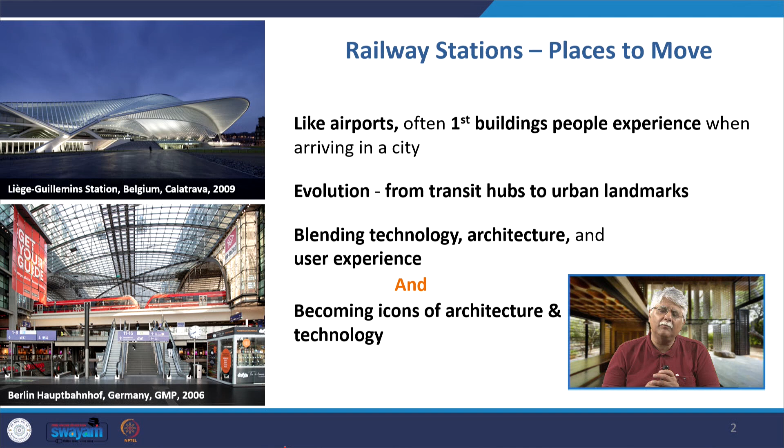Railway stations are familiar to all of us, we've all probably used them, particularly in India. They are places to move, like airports, often the first building people experience when arriving in a new city. Its evolution from what it was, just a transit hub, to an urban landmark today is phenomenal. The blending of technology, architecture and user experience has taken place, and therefore railway stations themselves have become icons of architecture and technology - not just gateways for travel, but symbols of connectivity, bridges between people and places and their cultures.

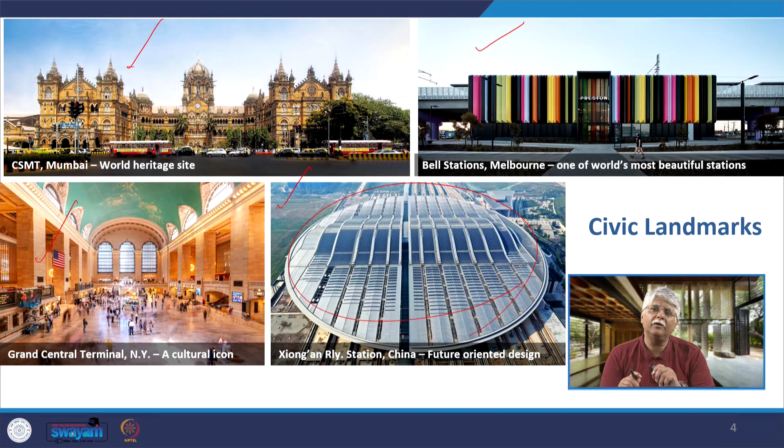The stations today are not only just stations as transit hubs, but they are also civic landmarks - monuments of public life and identity. They reflect changes in mobility, technology and culture. If you have the Chhatrapati Shivaji Terminus in Mumbai, that is a World Heritage Site. Or the Bell Station in Melbourne, one of the world's most beautiful stations. Or the Grand Central Terminal in New York, which is a cultural icon. Or one of the latest, the Xiong'an railway station in China, which is a future-oriented design - you see all these solar panels mounted on the railway station. All of them civic landmarks in their own right.

Now if you look from history to contemporary how things have changed, we have seen pictures often in my presentation of the St. Pancras station, making several points through these pictures. It shows us a historic station which is monumental and an industrial age icon. On the outside it's got an eclectic facade, architecture of a mishmash of several styles, but as you enter you find a tremendous glass and steel vault over the railway tracks, showing the technology aspect of glass and steel being used there.

In the 20th century the shift happened to a more functionalist modernist design, like we find here in the Roman Termini station in Italy in 1950. It has got this massive cantilever in front, this kind of design in front and these blocks behind it - a very functional modernist design of the 20th century.

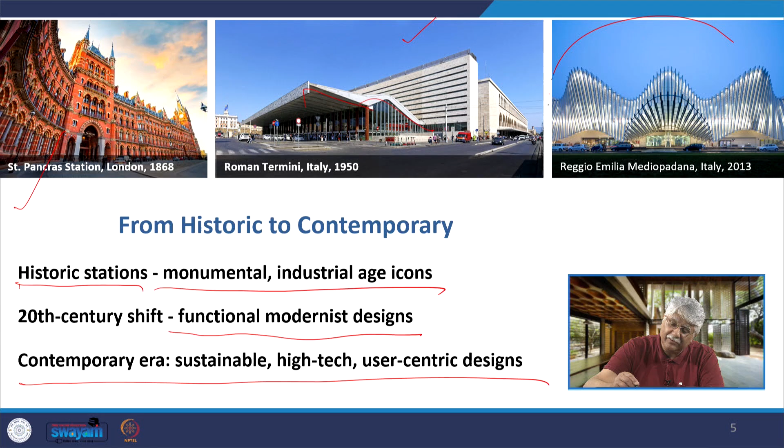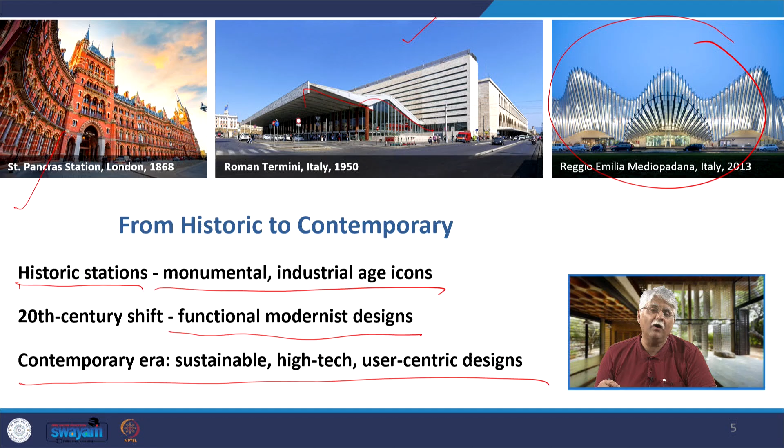But when we come to contemporary times, our stations are sustainable, high-tech, user-centric, and generally many of them are fantastic in their forms. This is the Reggio Emilia Mediopadana station in Italy - we will simply call it the Mediopadana station. The legacy of high-tech architecture in transport hubs, where today's ideas came from. First is structural innovation, and for that the pictures I am showing you actually are not of a station but of an airport.

They are exposed trusses, tension structures, for example concourses. Concourses of airports and railway stations are big halls made from repetitive steel and glass modules which are flexible, efficient to build and filled with daylight. If you remember any concourse space like that, you think of natural light flooding into the concourse.

Services as design: in the early high-tech, as in Pompidou and Lloyd's, the services are exposed and celebrated visually. In the mature high-tech, like Commerzbank, the Swiss Re or the Gherkin building, the services become integrated smart systems which are celebrated functionally.

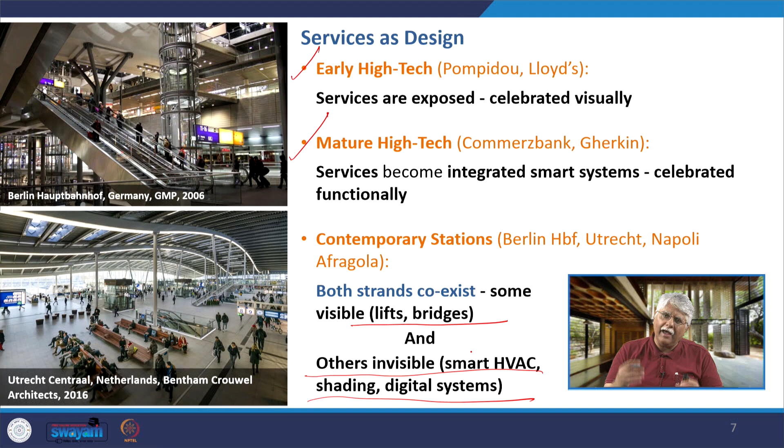In contemporary stations like the Berlin Hauptbahnhof, Utrecht, Napoli Afragola station, both strands of early and mature high-tech coexist. On one hand, there are visible lifts and bridges inside the building as in early high-tech. Along with that, there are other invisible features like smart HVAC, shading and digital systems, which as part of mature high-tech are there but invisible.

Sustainability roots are there. Early experiments in natural ventilation, double skin facades and building management systems, we find in, for example, the Swiss Re in 2004. That evolved into today's green stations and terminals with solar roofs, rainwater harvesting and smart BMS.

Now when I am relating a corporate building, an office building with a station, please don't feel surprised. This could apply to many other building typologies also, where a similar ideology or concept of rainwater harvesting, building management systems or solar roofs is being followed.

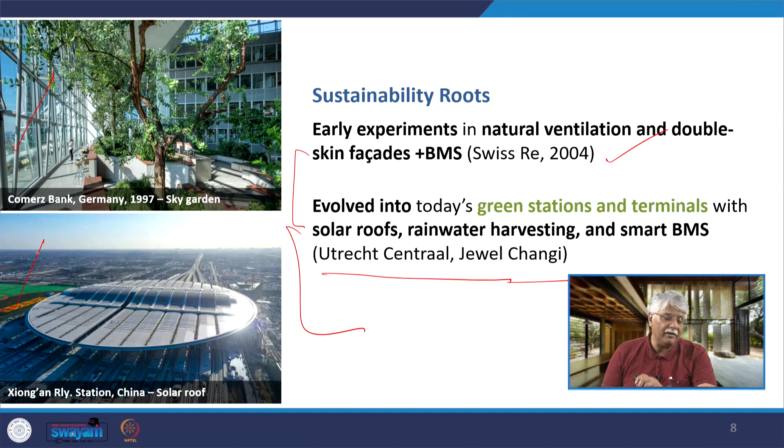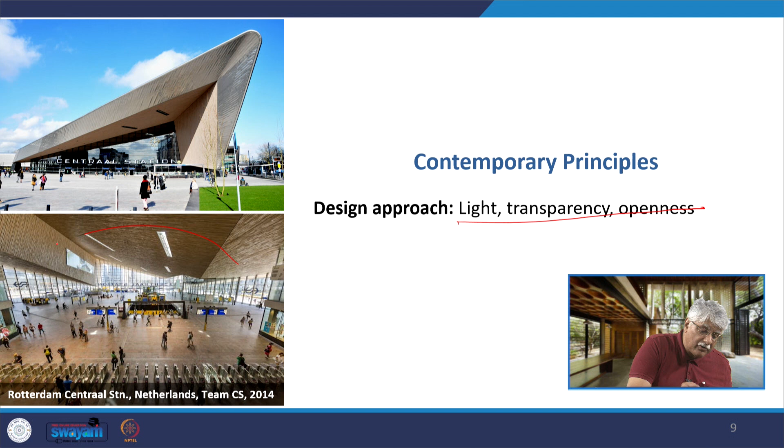In contemporary principles, the design approach in stations is all about light, transparency and openness. Looking at Rotterdam Central Station, Netherlands, by Team CS, we find this monumental structure with tremendous openness in the concourse of the station.

Contemporary principles about stations also focus on technology and smart systems, important for the comfort of passengers and ease of travel: smart ticketing, real-time information, digital wayfinding and automation, passenger comfort through tech-driven design. That means even the design of the chairs is tech-driven, so when a passenger has to sit for a longer period, he continues to remain comfortable.

Contemporary principles also address passenger experience regarding comfort, providing lounges, shops and accessibility in railway stations, like airports. They provide human scale interiors in mega structures, leading to inclusivity, meaning universal design accessible to all, whether typical or diverse, including those who are physically challenged, with wayfinding for the user.

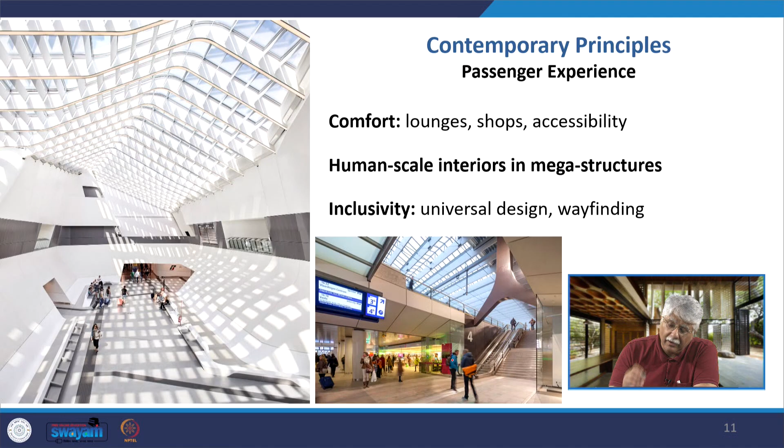Contemporary principles also include sustainability in stations. This station, Utrecht Centraal Netherlands by Bentham Crouwel Architects, has, because of its roof design, daylight optimization, rainwater harvesting, energy efficiency through minimizing HVAC load, solar integration and a lightweight design to reduce the use of materials.

Thus, daylight harvesting, natural ventilation, green roofs, solar integration and even adaptive reuse of old stations have now become part and parcel of contemporary railway stations.

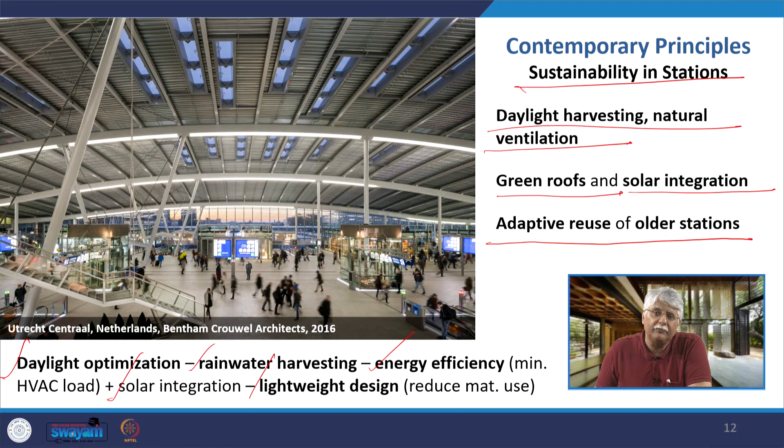Contemporary railway stations are not just transport terminals. Now they have become urban connectors, physically and socially joining different parts of the city, removing barriers created by old railway lines, through bridges, concourses and plazas that allow free pedestrian movement across the track.

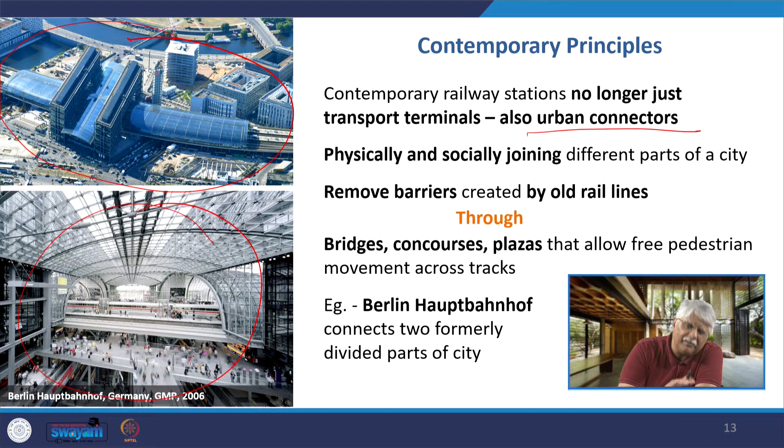One such station is the Berlin Hauptbahnhof. The Berlin Hauptbahnhof station connects two formerly divided parts of the city. In the aerial view, it's actually joining two divided parts, with plazas, concourses and bridges that link those parts together and allow people to move from one to the other through the station. So people are not just coming here to travel from point A to point B; it is not just a transit hub, it has become a civic space.

Contemporary principles indicate that urban integration is taking place into the city fabric through railway stations, because they also have shopping malls, offices, even housing, and public meeting places, not just transport points. They are catalysts for redevelopment, stimulating new life and growth in the areas they connect. They cause economic growth and development where built, and transport that economy and resources to the areas they connect. It's multi-modal connectivity, hubs where different transportation systems and urban areas converge together.

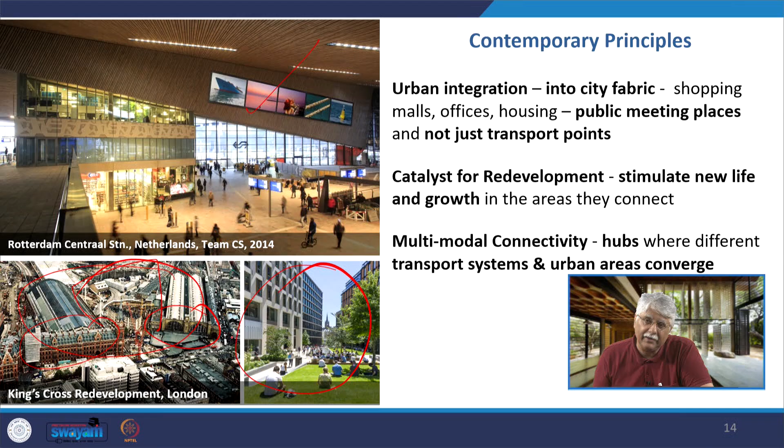We have examples of the Rotterdam Central Station in the Netherlands, and the very interesting example of a redevelopment involving St. Pancras station and King's Cross station, two stations close by, being worked upon so that there will be an entire new development between them. You see this picture of that development happening, and an urban regeneration taking place in this area.

The economic and cultural impact: they are catalysts for redevelopment, able to revitalize neighborhoods and attract investment, create civic pride, and act as magnets for tourism. They have mixed use hubs with retail and offices.

If we want to look at the economic impact, let's look at the example of the Liège-Guillemins Station in Belgium, by Santiago Calatrava, 2009. The economic impact: it boosted Liège's regional profile by connecting it to the European high-speed rail network. The cultural impact was that it became a city landmark, attracting visitors and redefining the city's global image.

Is it not similar to the Bilbao effect, that one building can make such tremendous socio-economic changes to the city, just as the Guggenheim Museum had done in Bilbao?

The global spread of railway stations today, we will call them transit hubs or multimodal hubs. These high speed hubs we have in Europe, like in Liège, Torino, Napoli. In Asia there are mega terminals like the Beijing South or the Bang Sue Grand, or other regions where there are sustainable upgrades like the reservoir in Melbourne and the Newmarket in New Zealand.

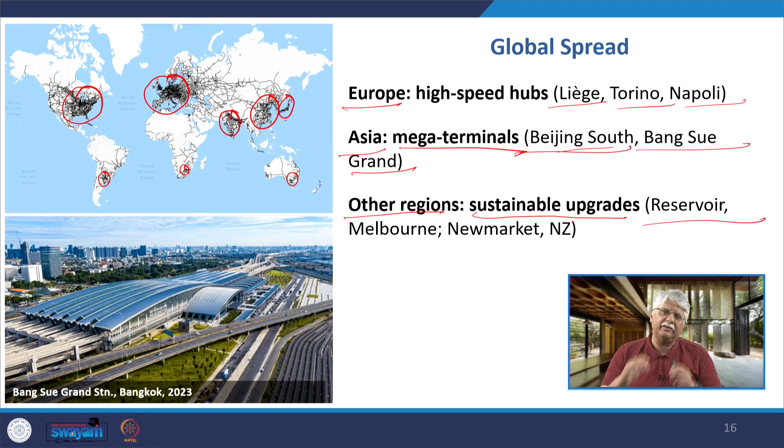So when we look at the case studies, whether the Afragola station by Zaha Hadid, the Rotterdam Central Station in Netherlands by Team CS, the Liège station by Calatrava, or the Torino Porta Susa station by Arep, each station has a unique design philosophy showcasing global trends and regional responses.

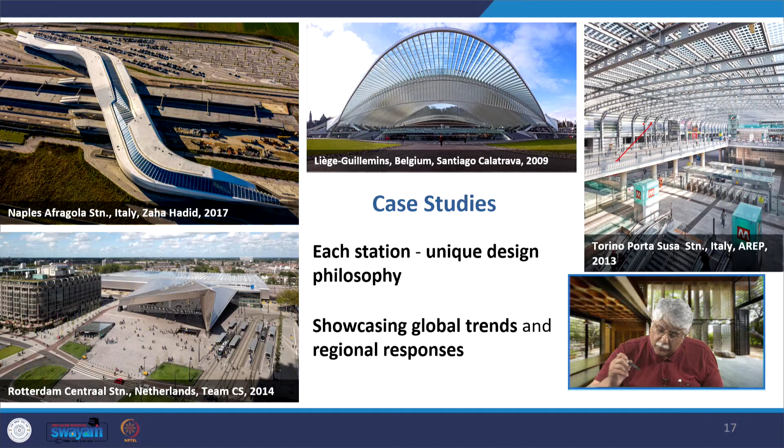Of all the people whose stations are today popular, the iconic ones globally, who have built the maximum number of such stations, the first name is Arep, who for example designed the Torino Porta Susa station. But the second name is that of Santiago Calatrava.

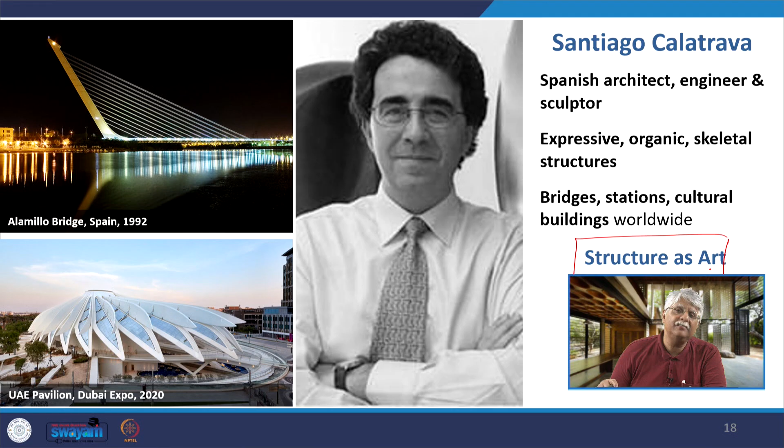He is a Spanish architect, engineer and sculptor. His design is very expressive, with organic, skeletal structures. Bridges, stations, cultural buildings he has designed worldwide, and in his case structure is used as art. Why are Calatrava stations pioneering? Because there is a structural poetry in the transit buildings. He transformed stations from machines for movement into architectural sculptures, like the Lyon Saint-Exupéry, or we can simply call it the Lyon Airport Railway Station, with a roof like a bird taking flight, symbolizing speed.

So the Lyon Airport Railway Station can be compared with the TWA terminal in USA by Eero Saarinen, many years back. Technology has advanced tremendously since he designed this station in 1994, but the idea is there, and this is called sculptural expressionism.

The spatial experience: he made passenger journeys monumental. Soaring concourses, dramatic daylight, sculptural canopies like in the Liège station in Belgium. The stations have become cathedrals of travel rather than just infrastructure.

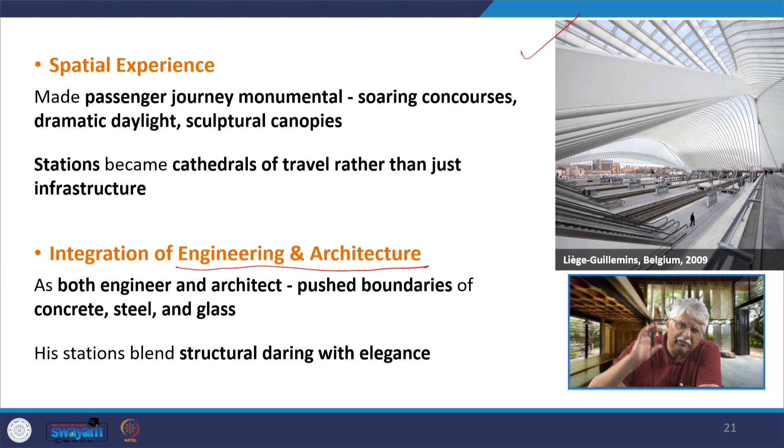There is integration of engineering and architecture in the work of Calatrava. As both engineer and architect, he pushed the boundaries of concrete, steel and glass, and his stations blend structural daring with certain elegance.

He has global influence. Not only is he designing stations himself, but others have followed to design stations and even airports. I don't know how much of that influence came via Calatrava versus personal inspiration, but we do find a new generation of station designs happening worldwide, especially in the high speed rail era. Many later projects carry echoes of his dramatic, dynamic roof forms, like the Naples Afragola station by Zaha Hadid or the Beijing T3 airport terminal by Norman Foster. We will come to this later.

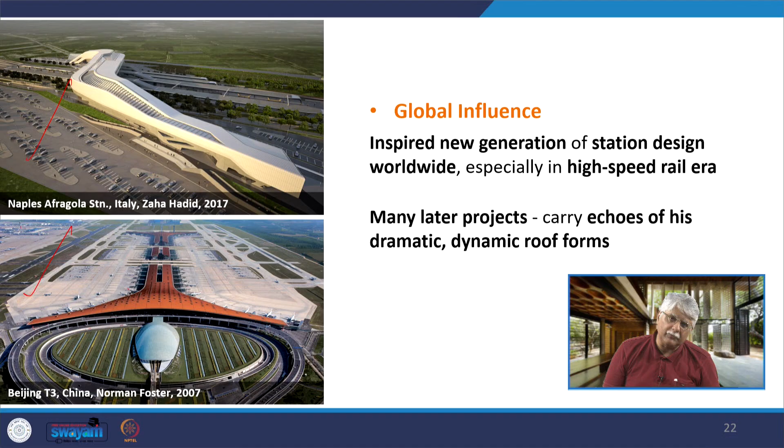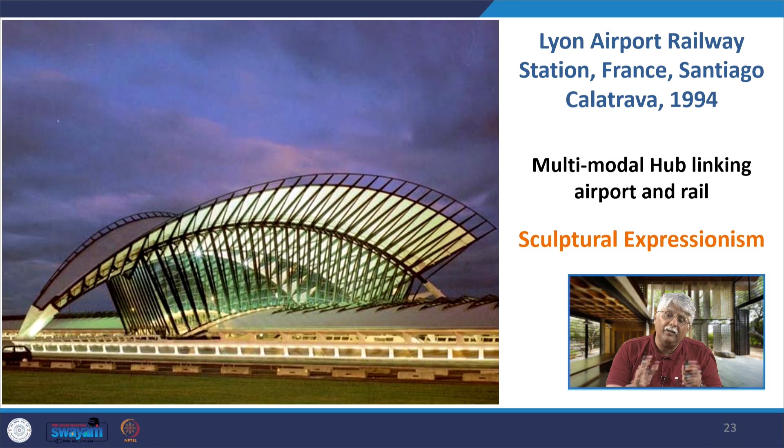Now let us come to the Lyon Airport Railway Station by Calatrava, 1994. It is a multi-modal hub linking airport and rail, and it is sculptural expressionism. The whole building is like an expressed sculpture. Look at it: this is the station, then there is a connection, then there is the airport. It is a multimodal hub, and that is one important thing that has happened to stations today.

They are turning into multimodal hubs, not just for trains alone. Many other activities are combined together in the station. It is conceived as part of a multimodal hub that integrates airports, highways and high-speed rail, making it the regional connector for France and Europe.

This is how the multimodal system is: we have the airports, and then we have the railway station here, and then there are other kinds of transport, for example buses, etc., whose provision is also made alongside. I mention this here because we will see a similar kind of concept or design in the station in Lisbon by Santiago Calatrava.

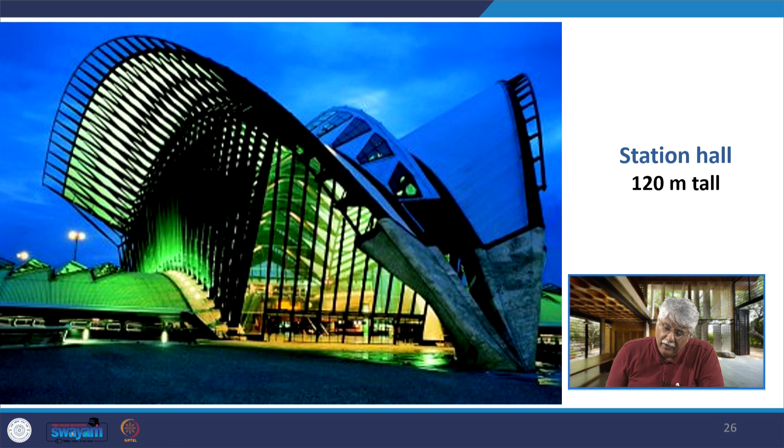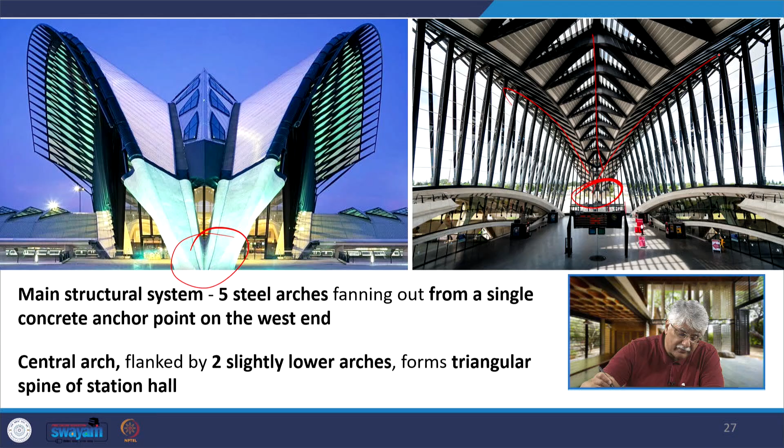The station hall is 120 meters tall. The main structural system is 5 steel arches that fan out from a single concrete anchor, which is here on the west side of the building, at the west end. The central arch, flanked by 2 smaller arches, forms the triangular spine of the station hall.

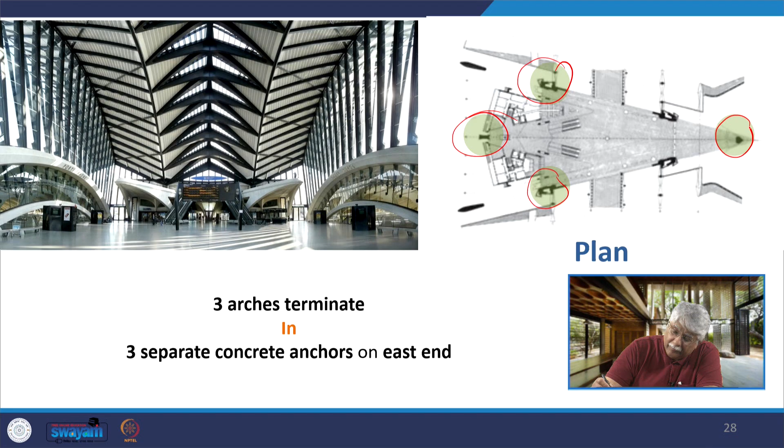Then there are 3 arches that terminate at 3 concrete anchors at the east end. So there's 1 anchor at the west end and 3 anchors at the east end. This is how the load transfer takes place, through these anchors down to the ground, and also from the structural members here.

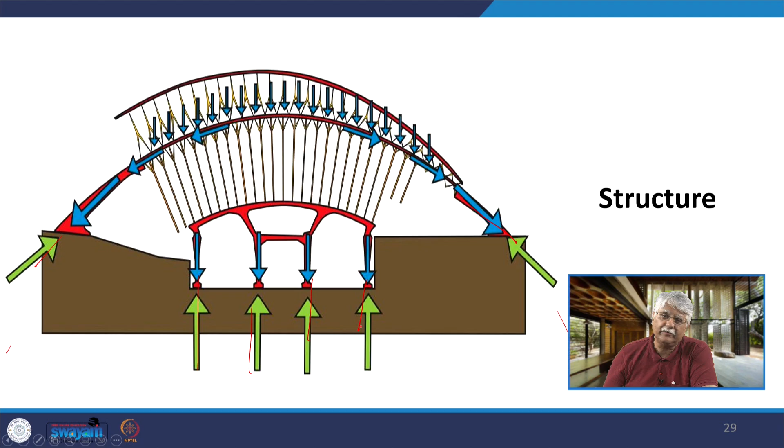Moving on, come to the Oriente Station in Lisbon, again by Calatrava in 1998, a filigree of steel construction, a network of steel members, a whole forest of steel members put together. It is an amazing building built for Expo 98 as Lisbon's main multi-modal transport system.

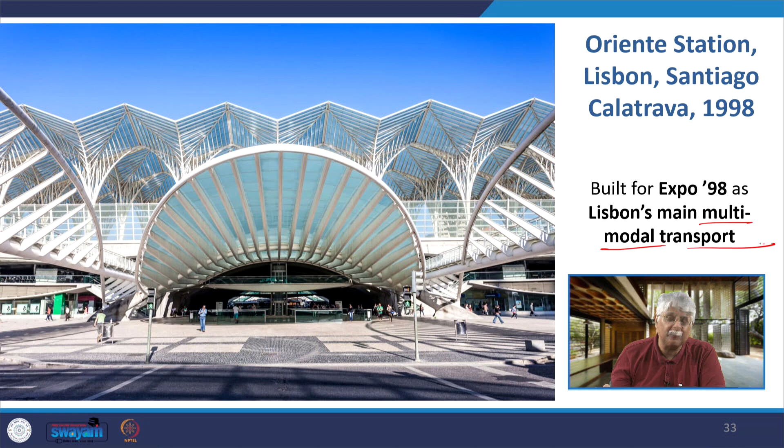What all is there in the multimodal system? It's got high speed trains, intercity and suburban rail, the Lisbon Metro station, local and regional buses and long distance coaches, taxis, and pedestrian walkways.

If you look at this plan, the aerial view, this side is where the buses and the cars are parked. This is the actual railway station where the high speed rail comes, and below this is the metro station. As you go from this side you are going towards the expo.

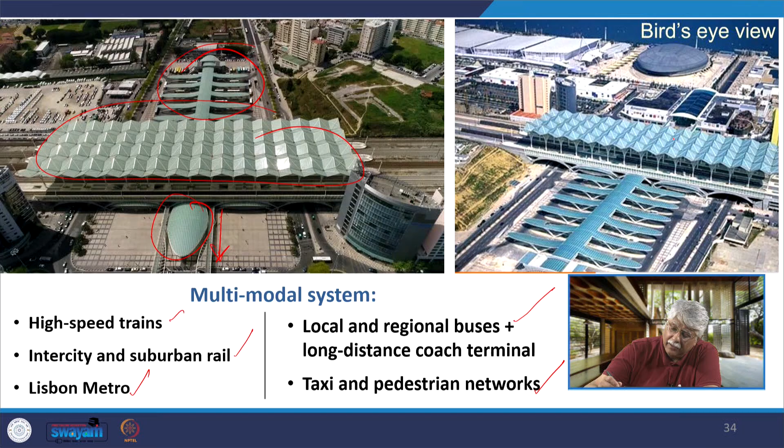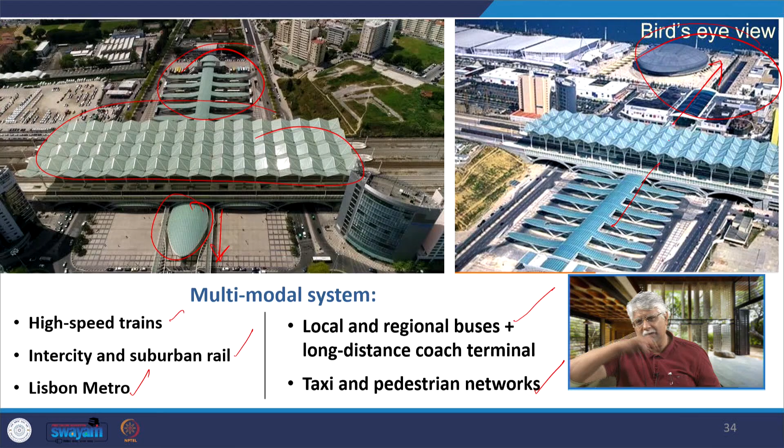If you look at it from the other side: this is the parking area for the buses, etc., the railway station, and going the other way is the expo area. I hope you get it. The station is in the middle. On one side are the parking areas for buses and cars, on the other side is the expo, and underneath the main station is the metro station. So there are 3 self-contained parts and 2 levels in the station.

The three parts are: one is the rail terminal, a ribbed roof structure. There is an underground metro station below the rail lines, and I'll correct you here - this underground metro station was not designed by Calatrava. Calatrava designed the whole complex, but this particular metro station was designed by another architect, Sanchez Jorge. The bus terminal and commercial parking areas form the third self-contained, distinct functional part.

Each part is independent, but it is visually and spatially connected, and that was one of the roles that Calatrava played in putting it all together as one.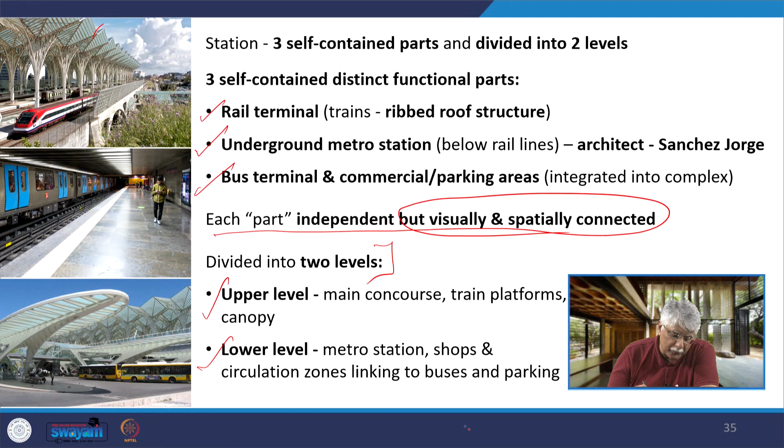It is also divided into two levels. The upper level has the main concourse, the train platforms and the canopy. The lower level has the metro station, the shops, and the circulation zones that finally link you to the buses and the parking. There are 4 platforms serving 8 tracks.

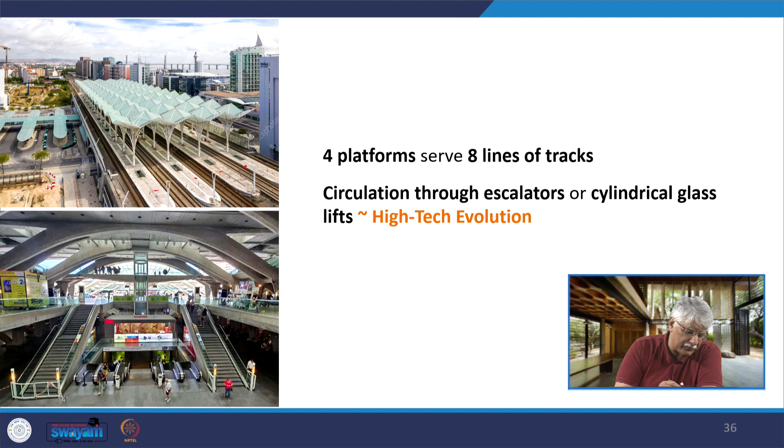Circulation is through escalators or a cylindrical glass lift that help transport you. All this visibility of these features is part of the high-tech evolution.

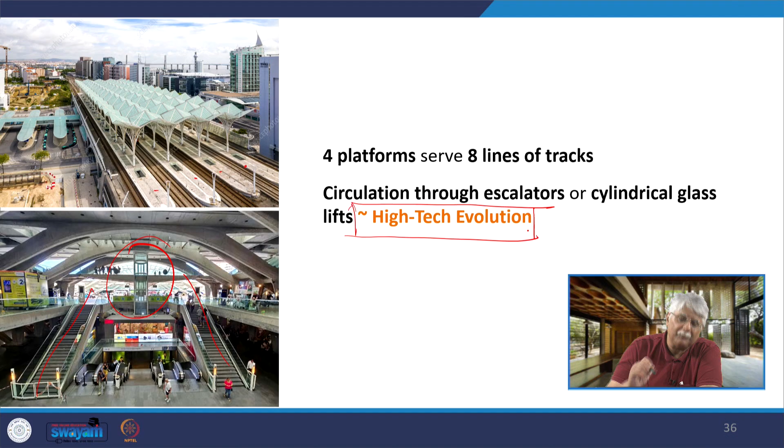The multimodal system: from the Oriente Station, on one side is the bus terminal and the parking areas, and on the opposite side, that leads to the expo grounds.

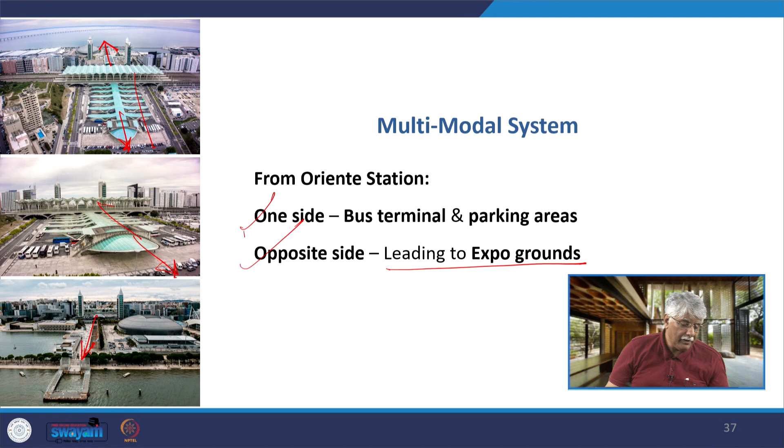Let me clarify again - from here, if you go towards the expo grounds, here you go towards the bus parking. Again here you're going towards the expo ground. In this case, this is actually the bus parking area.

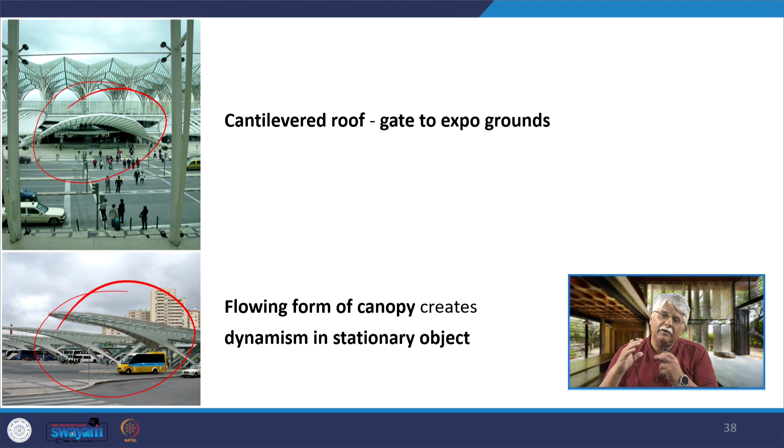The cantilevered roof has this gate leading to the expo grounds, and over the bus parking space there are these flowing canopies - dynamic in stationary. We see this dynamism in these stationary objects.

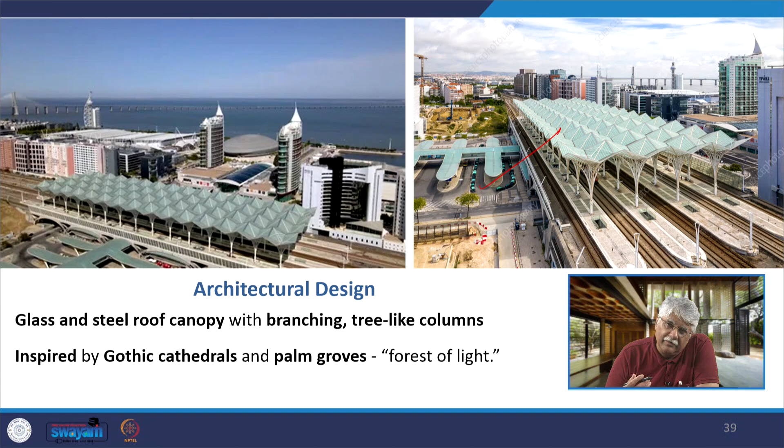Then we look at the glass and steel roof canopy with branching, tree-like columns. You find that in the railway station. It is inspired by Gothic cathedrals and palm groves - it's like a forest of light.

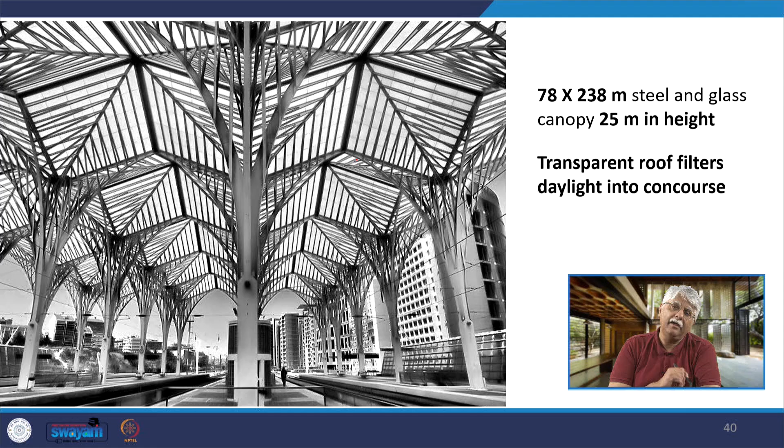This canopy is 78 meters wide and 238 meters long in steel and glass - 78 meters wide, 238 meters long, and 25 meters high. The transparent roof filters daylight into the concourse, and you see this forest of light here, how similar it is to the palm groves and how it also borrows from the Gothic cathedrals.

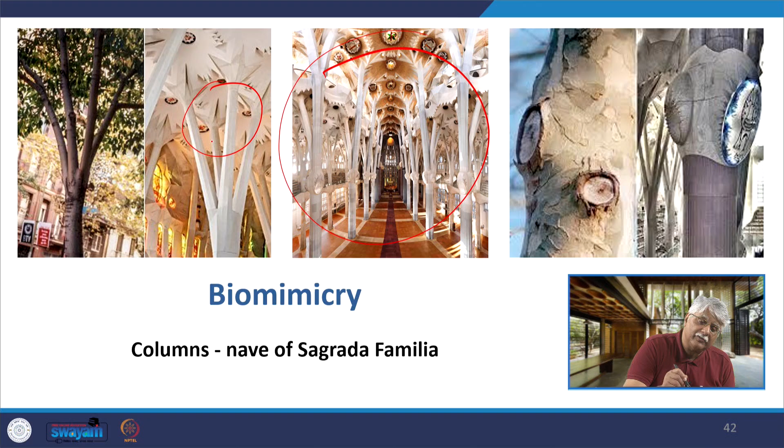If we talk of biomimicry, we have seen biomimicry in the works of Antoni Gaudi. The columns that you find in the Sagrada Familia are so close to trees, or even the knots in trees, found here in the columns of Sagrada Familia. It's pure biomimicry by Gaudi.

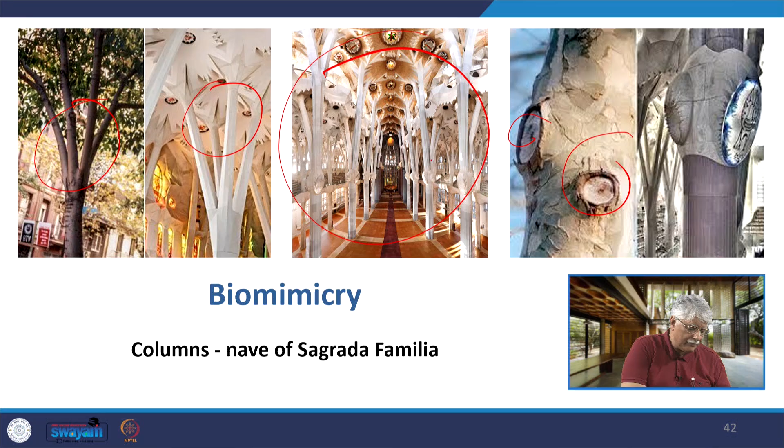When we compare the work of Calatrava with Gaudi, Calatrava is called in a sense the modern Gaudi, because both used biomimicry, both used skeletal forms, but in Gaudi's work it was more about nature and symbolism - he was imagining trees, shells, bones, and even spiritual, religious themes.

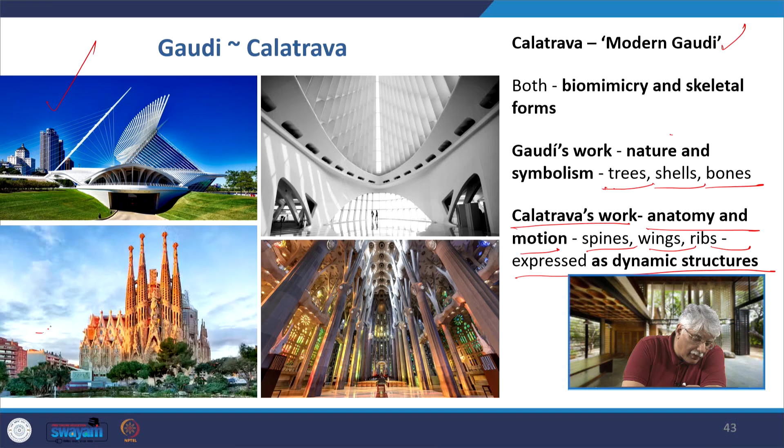In Calatrava's work, it's more about anatomy and motion. He thinks of spines, wings and ribs, and expresses his buildings as dynamic structures. So we have the example of the Milwaukee Art Museum by Calatrava as against Sagrada Familia by Gaudi - these are the interiors of these two buildings.

The station by Calatrava also resembles an earlier work, the Allen Lambert Galleria that Calatrava made in Toronto in 1992. The space inside the station is a cave-like space, evolved from a row of cut-out muscle men. Calatrava made anatomical or kinetic drawings of bones, of bodies, of movement, and then transformed them into an architectural structure.

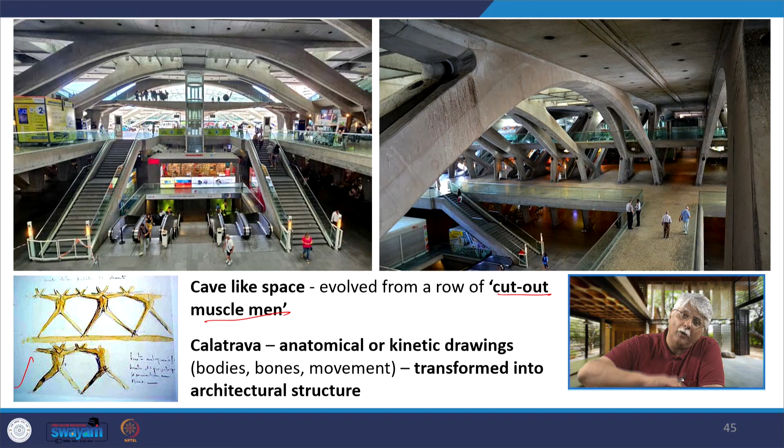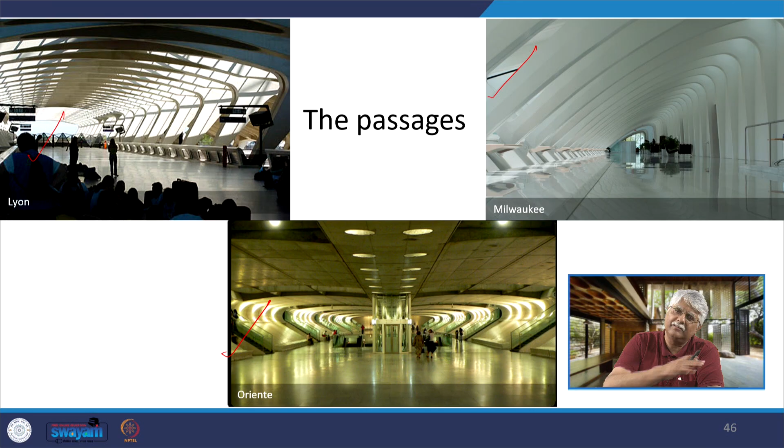Now coming to another architect, another work - we look at the contribution of Norman Foster in the metro station in Bilbao. He integrated architecture and engineering, having an excellent metro system. Norman Foster says the metro system is an excellent demonstration of how the built environment can influence the quality of our daily lives.

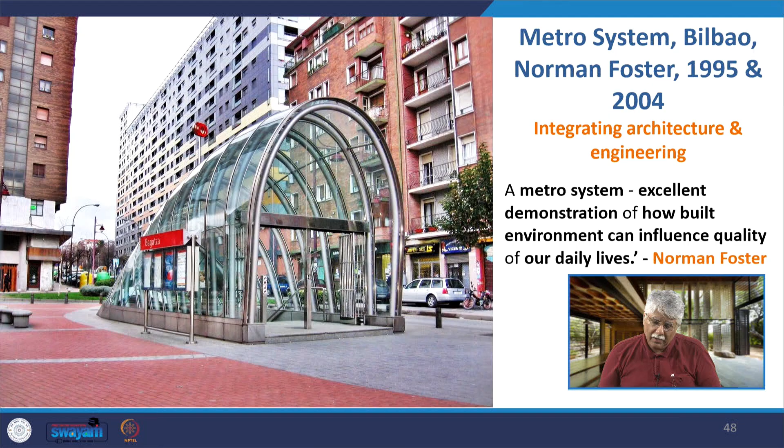So if we move on, Bilbao's metro system was part of Bilbao's urban renewal strategy that also included the design of the Guggenheim Museum in Bilbao. Foster did it in two phases, line 1 and line 2, and then an extension of line 2 later in 1997-2004.

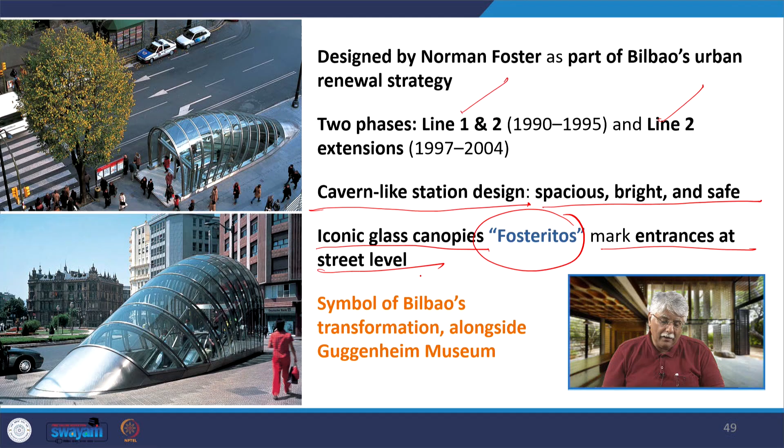There is a cavern-like station design which is spacious, bright and safe. There are iconic glass canopies on the outside at street level which were termed Fosteritos, and they mark the entrances at street level. They are a symbol of Bilbao's transformation alongside the Guggenheim Museum.

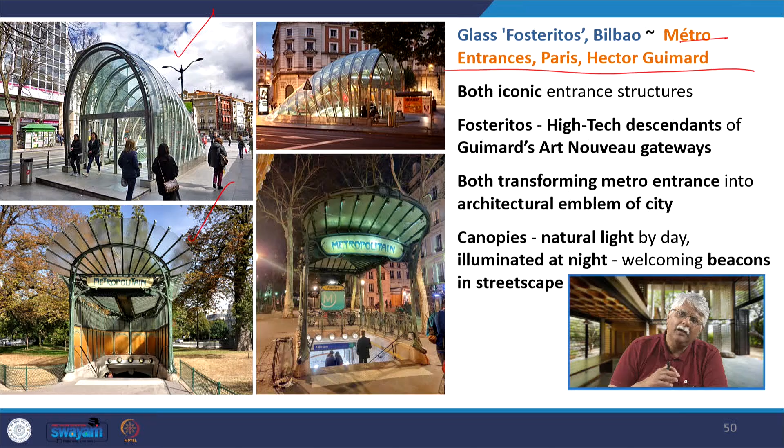Fosteritos are high-tech descendants of Guimard's Art Nouveau gateways, and both are transforming metro station entrances into the architectural emblem of the city. The canopies catch natural light by day and are illuminated at night, welcoming beacons in the streetscape of the city.

These are the various Fosteritos in Bilbao, and one of the stations, metro station line 1, is called the Abando metro station by Norman Foster.

It is a cavern-like station design. What is a cavern-like station? A cavern-like station is one where the underground space is carved out as a large continuous vault, like a cave or a tunnel with curved concrete walls and ceilings forming a single enclosure.

Instead of boxy halls with columns, a walkway over the track is provided here, as you see, for people to cross from one platform to the other.

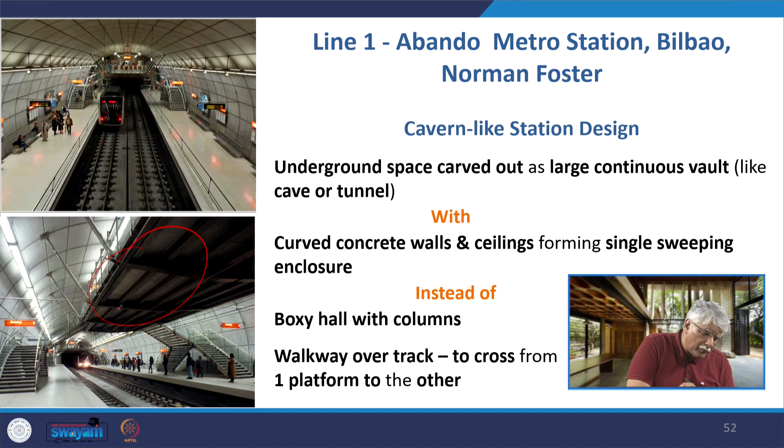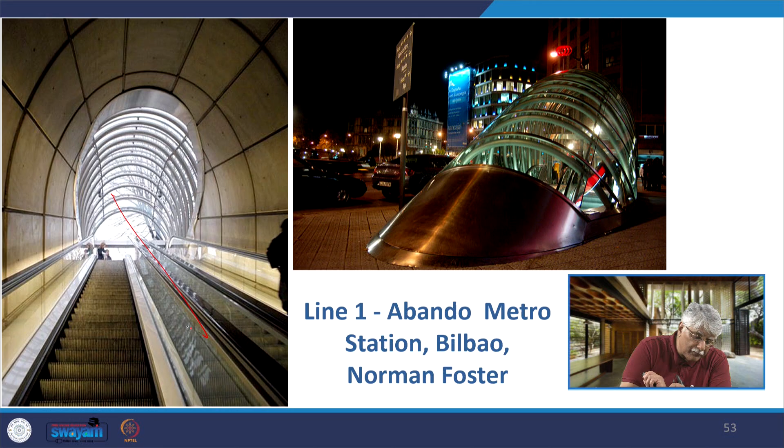So in line 1 we have the Abando metro station by Norman Foster. You can see the amount of natural light that floods down into the station from the Fosterito.

Now he uses precast concrete shells to express the tunnel's form, along with a contrast with this light network of steel stairs and mezzanines in the station.

This view gives you exactly how the movement takes place in this axonometric. Here is the Fosterito from where you go down through the escalators into the station and then move ahead. If you want to cross the platform, this is the passage and you go to the other side.

A typical station showing the direct route from the platform to the street, with routes clearly defined so it needs no signage. The need for signage is in fact minimized.

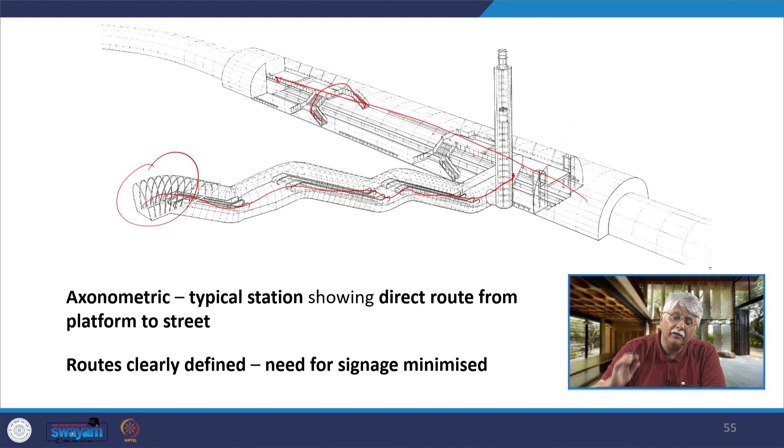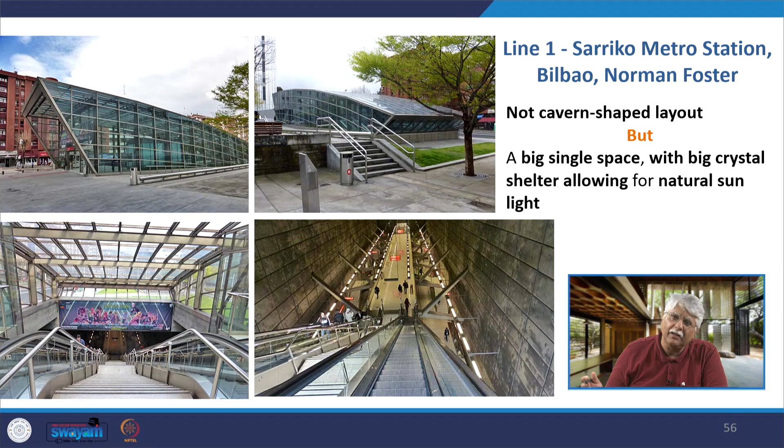When we come to the Sarriko metro station in Bilbao by Norman Foster, it is not a cavern-shaped layout, but a big single space with a big crystal shelter allowing for natural sunlight. The main hall is suspended directly above the railway tracks.

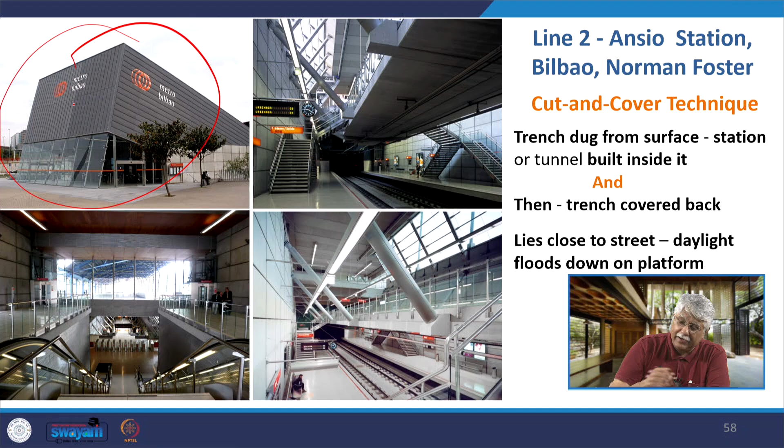In line 2 there is the Ansio station in Bilbao by Norman Foster, which is box-like. It is a cut and cover technique that is used here - the trench is dug from the surface, the station or tunnel is built inside it, and then the trench is covered back. It lies close to the street and daylight floods down onto the platform.

The reason for the box-like opaque design is that it serves Bilbao's exhibition center, from which it gets huge event crowds. It's therefore a big rectangular box with wide circulation space that can take in lots of passengers. It is very robust, utilitarian, functional and a crowd-resistant station form.

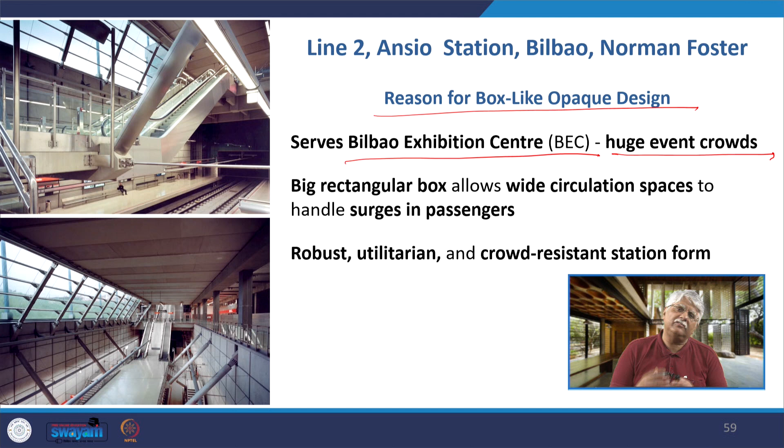Then we come to the next metro station design he did - the Canary Wharf underground station in London in 1999. It is one of the largest underground stations in the world, 24 meters deep, about 265 to 300 meters long, serving London's financial district.

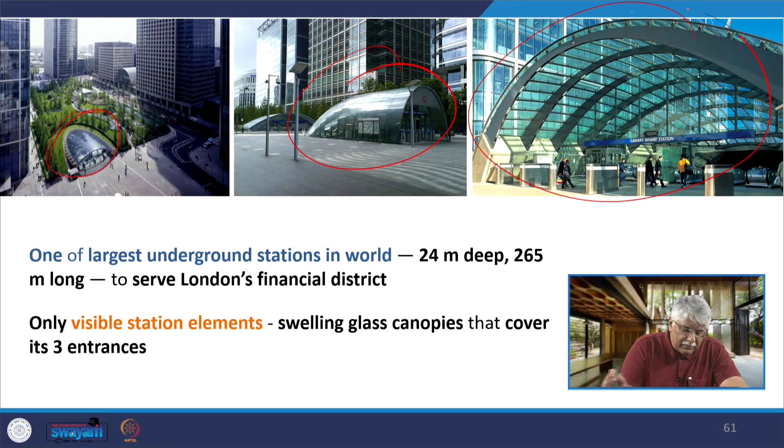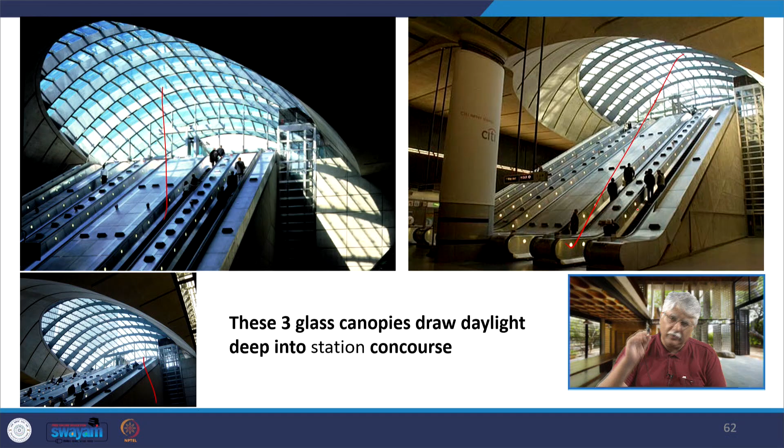Only 3 canopies are the visible elements of the station. You find these 3 canopies and they are the visible elements, the 3 entrances, and from these 3 glass canopies natural light floods deep into the station. Of course these pictures are showing you only one, but that is how it happens with all 3 of them.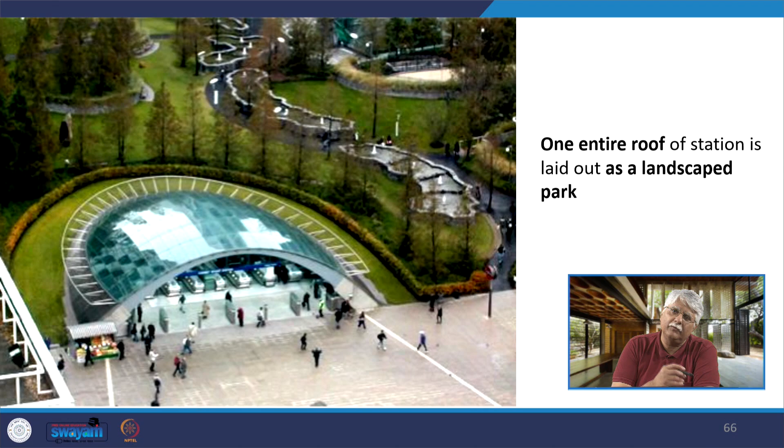There is one entire roof of a station which is laid out as a landscaped park, and the station is more or less 300 meters long. It is as long as the Canary Wharf tower is tall.

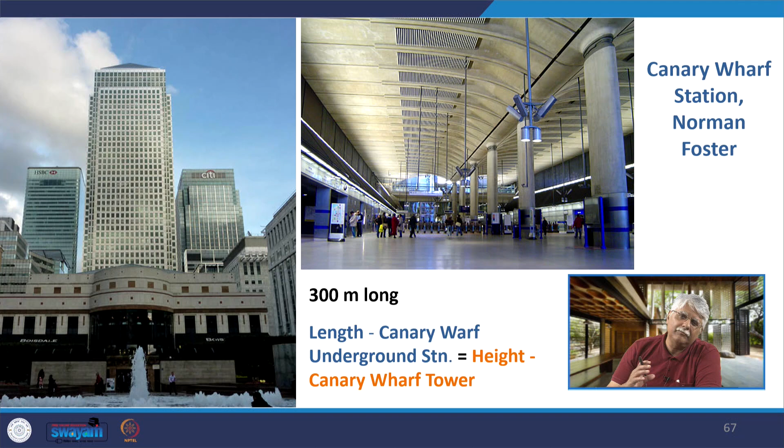The design approach is that it is built using the cut and cover technique, with vast cathedral-like underground halls free of all visual clutter, plus a high volume of station traffic. This led to the guiding principle in building design that it should be durable and easy to maintain.

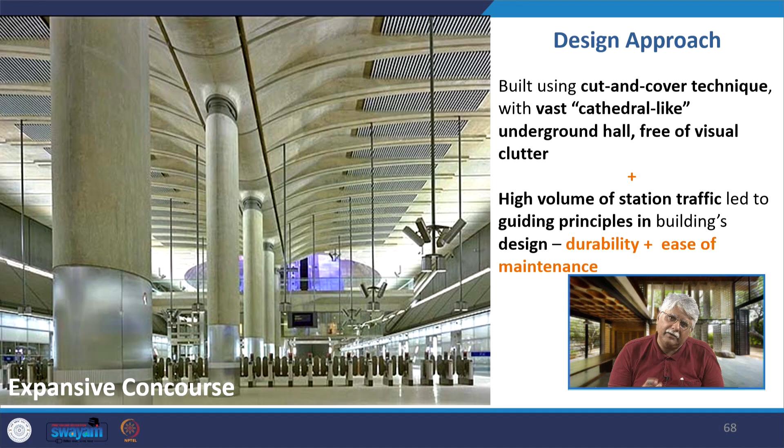Therefore, it is first of all a very expansive concourse. The result is a robust aesthetic in a simple palette of hard-wearing materials like fair-faced concrete, stainless steel and glass, and this robust aesthetic is most visible at the platform level.

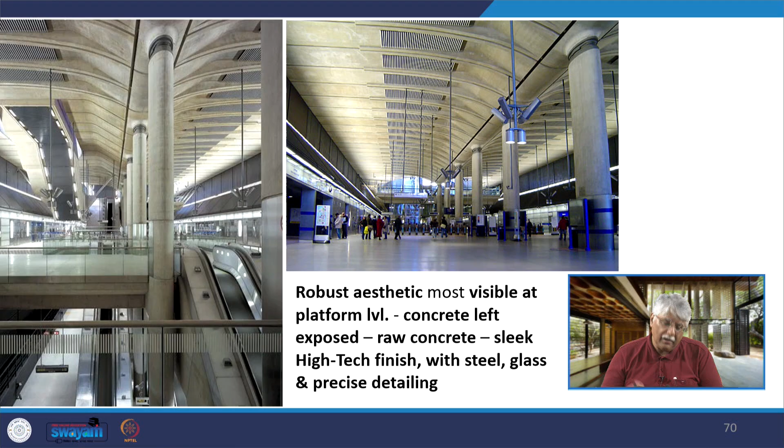The concrete is left exposed, it is raw concrete but sleek. There is a high-tech finish with steel and glass and precise detailing. So the overall fit and finish of the station is truly very well done, very well polished.

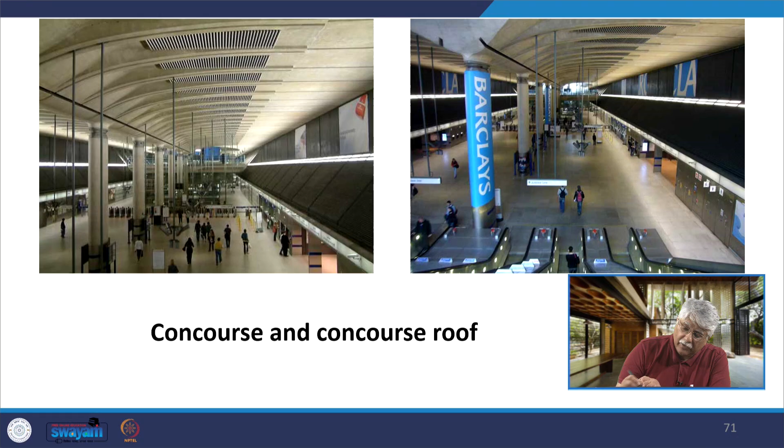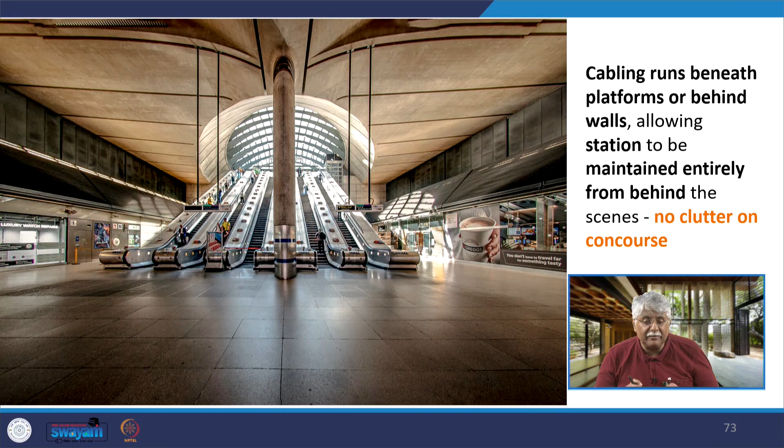This is the concourse and the concourse roof. The materials are simple, but there is complex security and technological innovation embedded in the building. The cabling runs beneath the platforms or behind the walls, allowing the station to be maintained entirely from behind the scenes, so there is no clutter on the concourse.

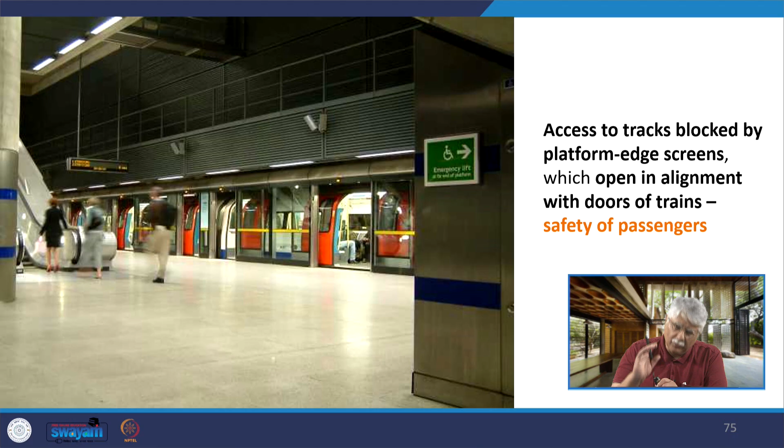When accessing the train, access to the tracks is blocked by platform edge screens which open in alignment with the doors of the trains to maintain passenger safety. You must have seen this in many other metro stations today. Thus we have the Canary Wharf underground station.

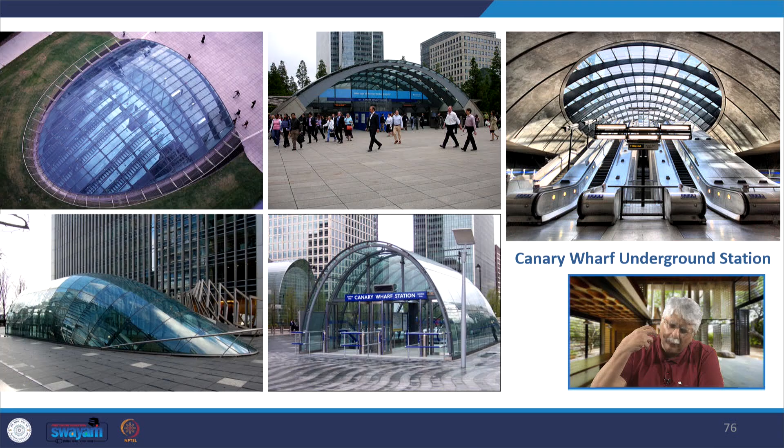So you would ask me, Professor, there are many more underground stations, what is so special about this one? What's special is how he is able to pour daylight inside the building underground. He takes care of those elements that make the whole travel experience underground more enjoyable and relaxing for the traveller.

In the Westminster Tube Station in London, I want to finish with this example because I was interested to know that Michael Hopkins has also designed a station.

Normally I would not associate him with such a project, but I found this example of Michael Hopkins, who is amongst that series of British high-tech architects.

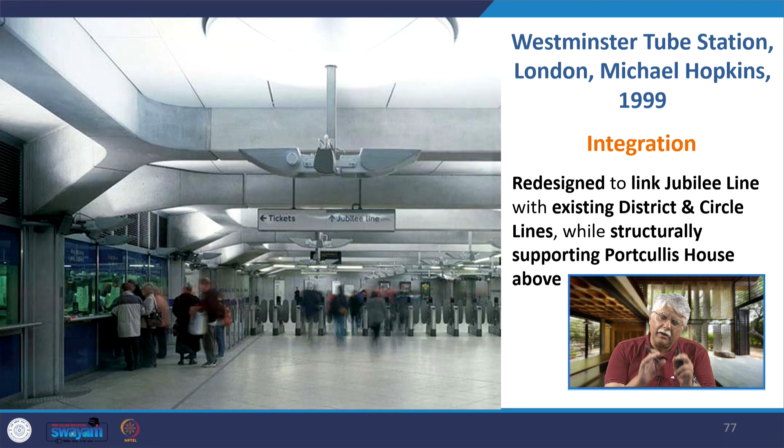Here we find integration. He redesigned what is called the Jubilee line, linking it with the existing District and Circle lines, while structurally supporting a building called Portcullis House above. The interesting part about this station is how well it took care to preserve the heritage structures above.

The structural expression is purely high-tech. The engineering elements, the diagrids, the braces, the columns are left exposed as part of the architectural aesthetic, as you see in these images.

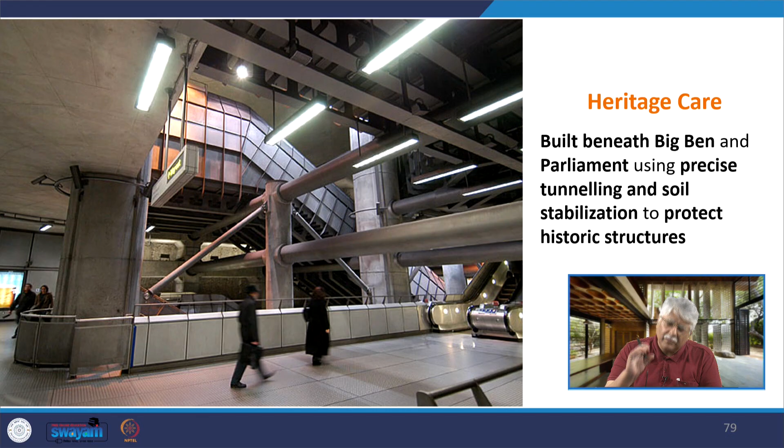But he takes care of the heritage by building it beneath Big Ben and the Parliament. He uses precise tunneling and soil stabilization to protect those historic structures. That is the key feature of this station that Michael Hopkins has designed.

In conclusion, what have stations given us? From infrastructure, they have now become a civic landmark. Stations are no longer only transit nodes but also symbols of urban identity.

There is architectural innovation in them. Use of high-tech materials, light-filled vaults and iconic forms are there which transform the experience of the passenger.

Integration and connectivity—they act as multimodal hubs. They are not just standalone railway stations, but multimodal hubs with metros, buses, retail and public spaces.

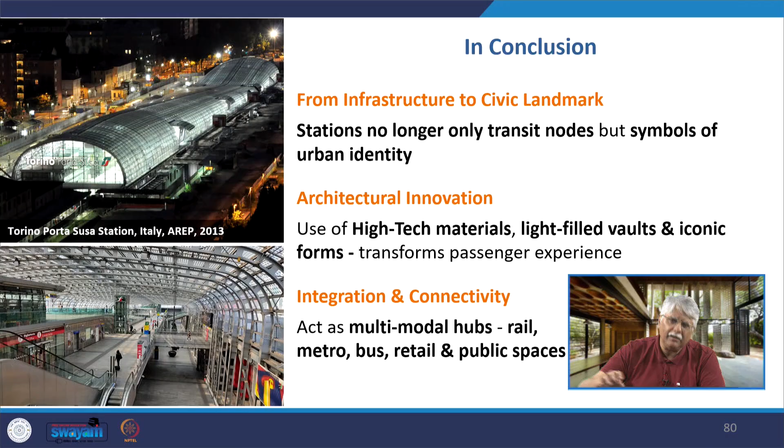Cultural and economic impact: from Bilbao to London, stations catalyze urban regeneration and revitalize economies. I gave you the example of King's Cross and St. Pancras station and how the new redevelopment is revitalizing that part of London, or the main contribution of the Berlin Hauptbahnhof station.

Journey as an experience—contemporary design emphasizes comfort, safety and civic pride, making movement or travel by train a joyful experience. Thus, contemporary stations are not just transport nodes but a civic place, a convergence of movement, architecture and community.

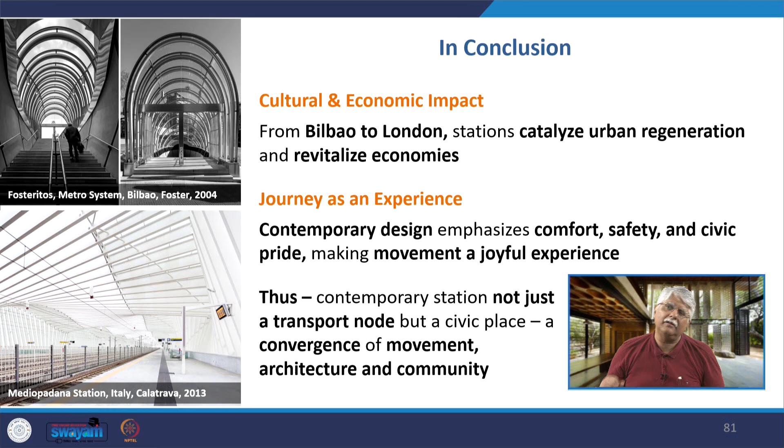Therefore, they have now once again become very important architectural features or additions to our modern cities.